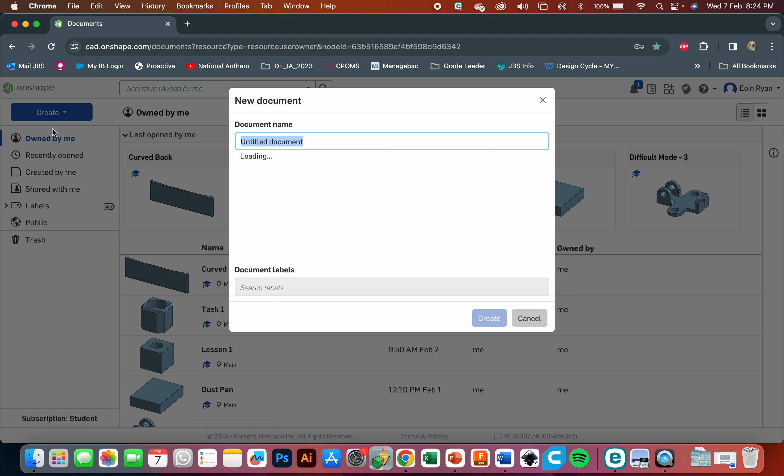To begin with, we're going to head on over to Onshape. We want to go to create document, and we're going to call this task 2. Let's create that and it'll load up for a second. Okay, so we're ready to go from here.

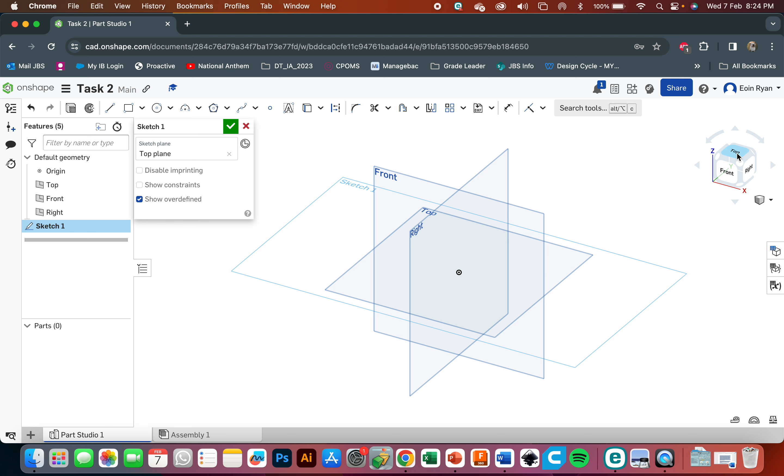The first thing we want to do is click on sketch and click on that top plane. I'll click over here on the right hand side and put that onto my top view, so I'm looking directly down on top of it. Now I'm just going to zoom out a little bit, not necessary, but it helps you keep your work centered.

Coming back over to my drawing, I can see that I need to have some form of a basic rectangle here. I can see I've got 10 plus 100 plus 10, which is 120, and I've got 80 plus 80, which is 160. So that means I'm going to have a rectangle which is 120 by 160.

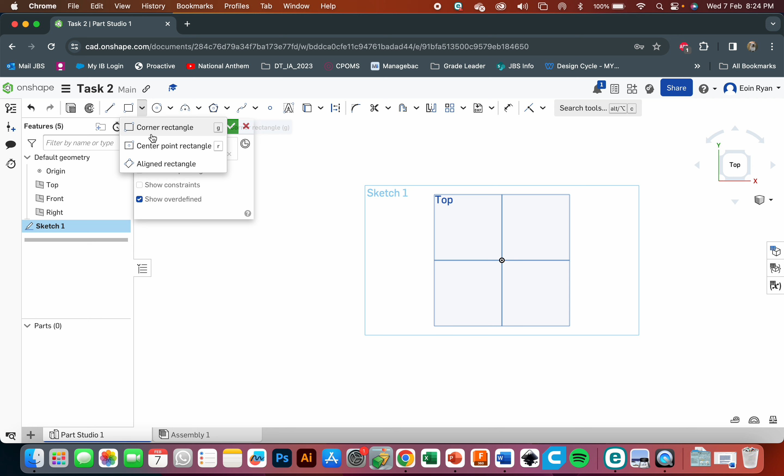From there, I'm going to go to a center point rectangle and draw it out like so. I'm going to come up here to my dimension tool, and change that front measurement to 120, clicking enter. And I'm going to change that side measurement to 160, clicking enter once more. So that's that part done.

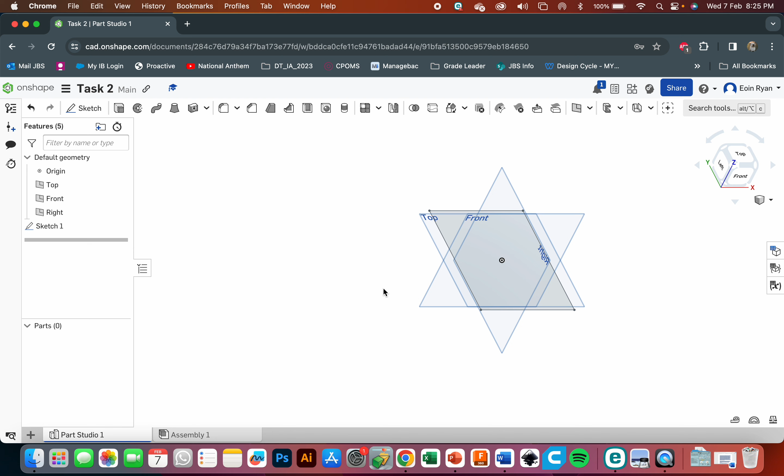I'm going to click on the green tick here, and now I'm going to use my mouse keys, so I can start to see I've got my shape somewhere inside there. Coming back over to my drawing, I'm going to put on this overall height that I've got in my work. You'll see that overall height is over here, which says it is 40.

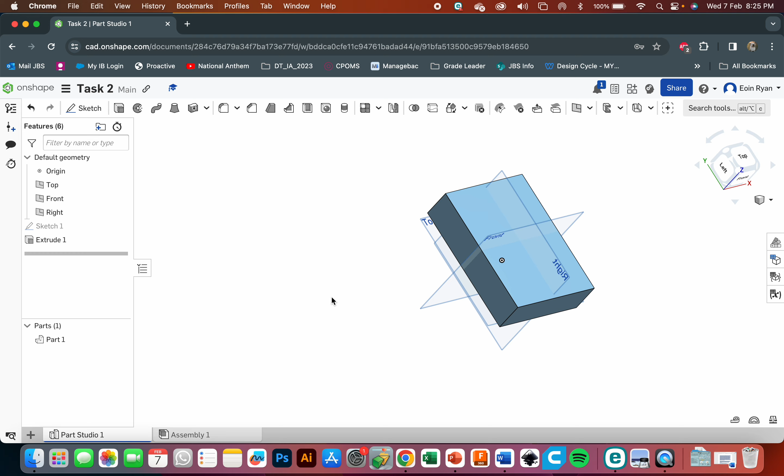So I'm going to go to extrude, and you want to click on that, and type in just over here 40, and click enter once again. So now we're left with this shape, and what we're going to do is start drawing these right corner triangles over here.

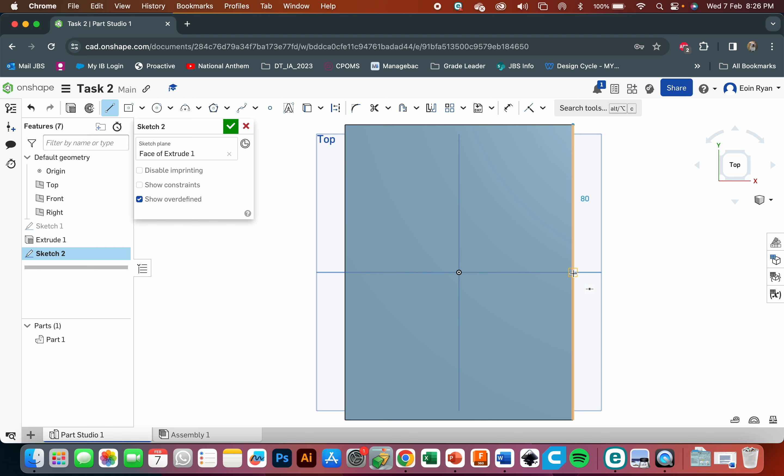You'll see that that's 30, and this distance from here to here is 80, which is just down here. So going once more onto sketch, I'm going to click the top surface, and rotate my drawing so that it's looking this way, and go to line. From here I want to draw a line which is 80 long, and that's going to stretch over here and back to this distance here.

Now the next thing I need to do is dimension that line from here over to here, and type in 40, clicking enter, and here once more that should automatically be set as 80 because you've got that distance there. Now I'm going to repeat the same thing on the other side, from here to here, back over and across. Then once more, I just want to dimension that space there and repeat it once again.

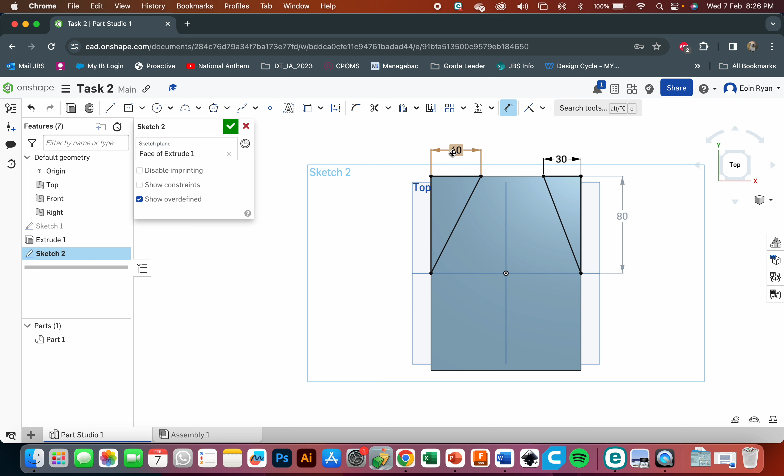Oh, I'm after making a quick mistake there. You see I've said 40. If you make that mistake, all you need to do is double click on your work and type in 30 - my apologies, that's my mistake. And 30. So there you go, you've got your work there.

Then what you're going to do is, again, use my mouse keys. You don't need to do this, but I think it helps with visualizing this. You're going to go to extrude once again. So if it doesn't select your work like it automatically did for mine, it may look something like this - you just need to use your cursor and select on those parts.

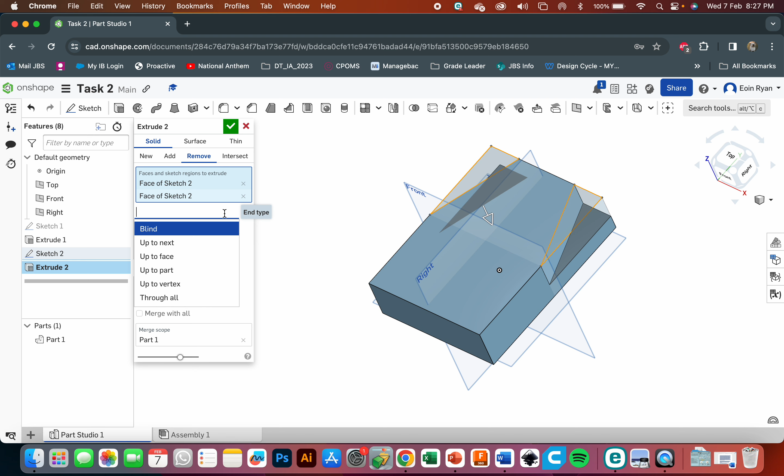A lot of people might just type in the measurement here, but make sure you click on remove. The next mistake some people make is they may have it on surfaces, so make sure that you always have your work sit on solids. Once that's done, you'll click on your two parts, and you can change blind to through all, and then click on the green tick. So now you've ended up with this shape here.

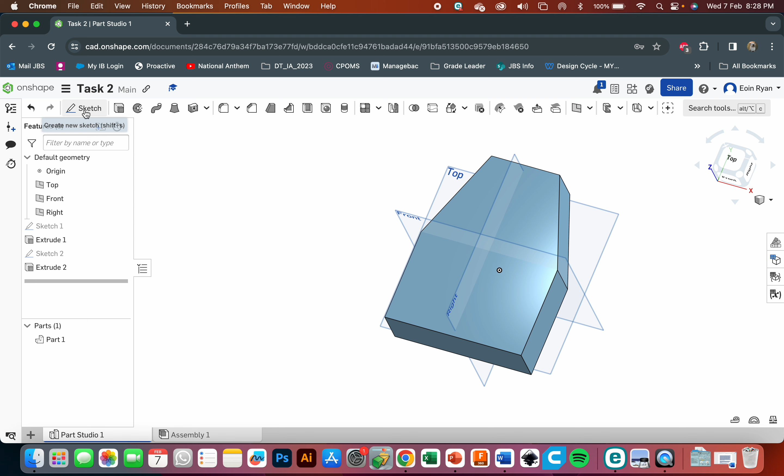From there, where you're going to go is we're going to draw this circular part in here. You can see that's radius 40, and then the distance from here to here, which is the diameter, is going to be 80. So from the beginning, you're going to go to sketch, and again to the top surface, rotate your drawing into your top view.

You're going to go to circle, and drop in a circle there, no size unknown. You're going to use your dimension tool, click on the edge, drag it across, and type in 80, clicking enter.

From there, what you're going to do is create this almost V shape outside here. Come across to your work, use the line tool, click on line just over here, and we want to come from the edge of your work.

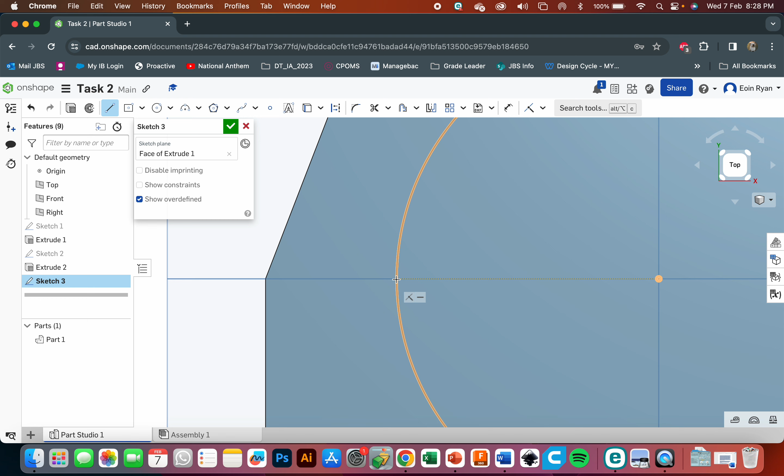You'll know you're selecting on the edge of your work when you see almost a dotted line come up, and when you're right on the edge of your circle, it will come up in an orange color. So we want to click on that edge. Zoom out once again, drag it somewhere down along here, and bring that distance across. Now just to stop that line following me around, I'm going to press escape.

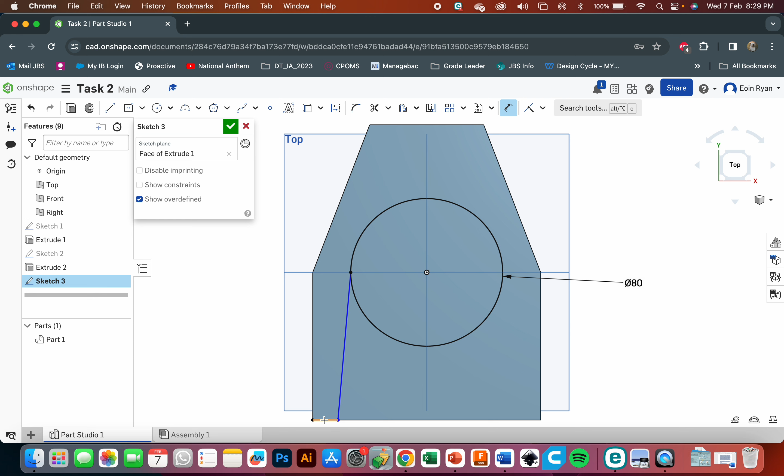And I'm just going to track my work up a little bit more there. I'm going to go to my dimension tool once again, draw this in for 10 millimeters, and click enter. So that's that part done.

So I want to repeat that line over here on this side. Go to line tool again, repeat the same thing once again, and over here press escape on my keyboard. Go to your dimension tool, and type in 10.

Now that's not fully done. We need to close off this drawing in here. So you're going to again go to your line tool and draw that line across there. So now we can click on escape, and what you can see now, it's highlighting.

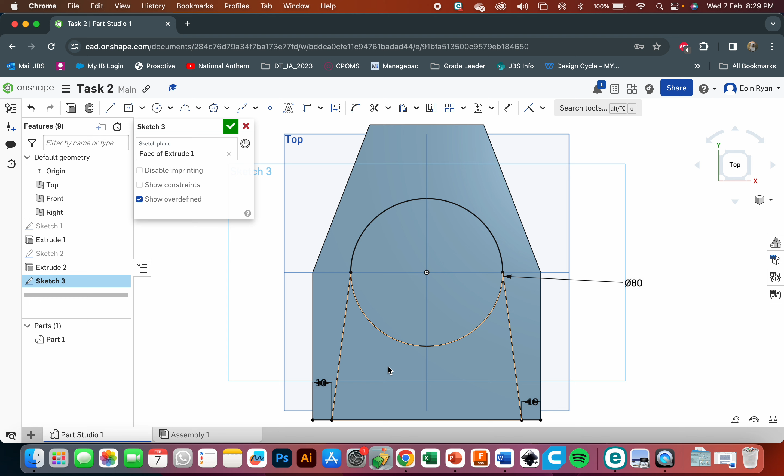For some of you that was a big issue with today's lesson. The biggest reason why that's not appearing is some of you haven't drawn this line on it, and some of you have got this slightly moved, so that seems to be a big area for mistakes. But if you follow those steps, hopefully you should be able to get to here.

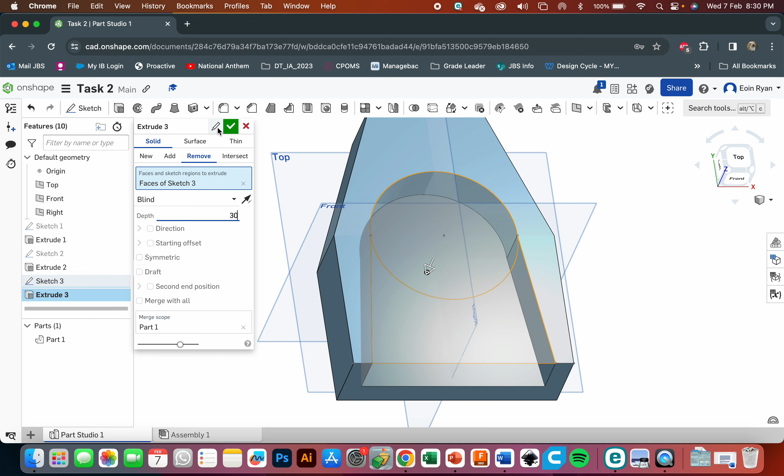From here, we can see that that's going down a distance of 30. Now I know that's sloping at the front, but we're going to completely ignore that till the very end. So we know that's going down 30. Let's do that now. You're going to go to extrude, go to remove, type in 30, and if you click on the green tick, there it's there.

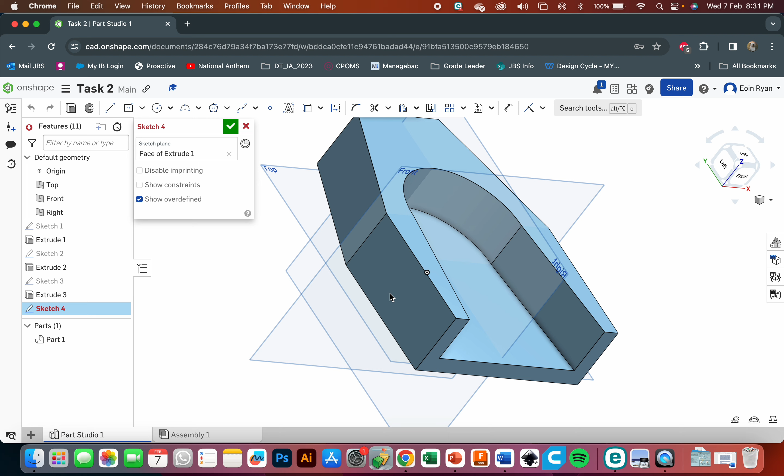So again we've kind of got a triangular shape here, and we're going to draw that on the side of our work and cut it across the whole way, 20 by 80. To do that, go to sketch once again, and click on any side, it could be this side or the far side. I'm going to click on that, and move that fully across so we're looking directly at it. Let's double check our drawing so we don't make a mistake.

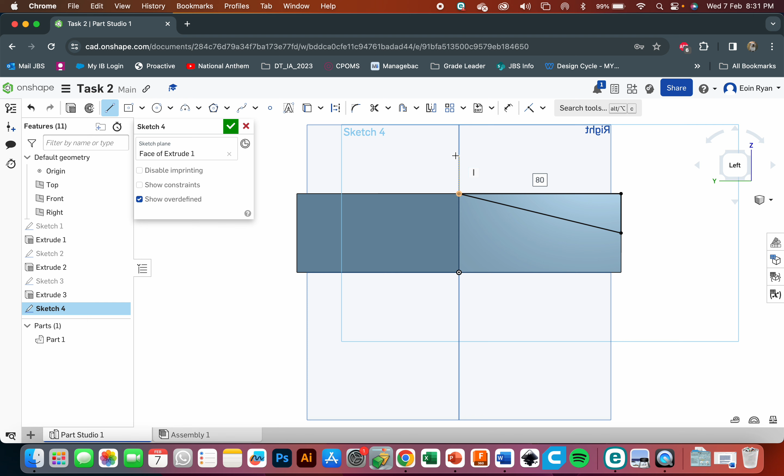So 20 and 80. You want to go to our line function again, step down here 20, and then that is going to come up to this point and come across to here. Now some of you will say, how do you know those distances? Again, if you set your drawing up correctly, I'm using those planes of reference to really help me out, the same way I would have drew with my semicircle there at the beginning.

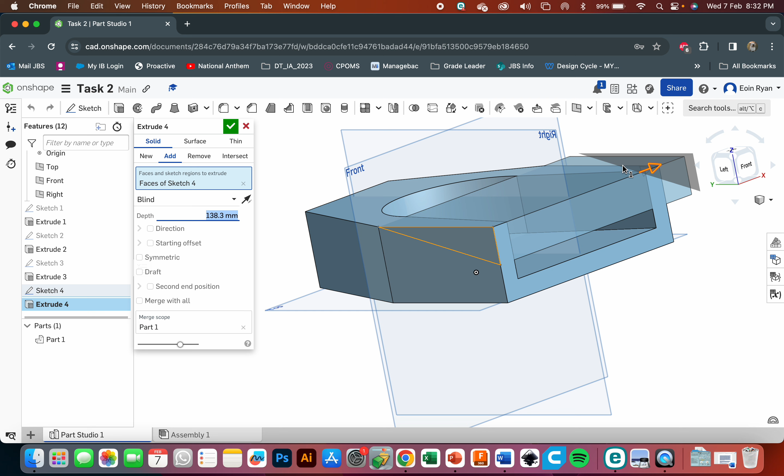Go to my dimension tool, click on this line here, double check it, make sure it's 20, that's great, and double check this one, it's 80, okay, so that's perfect. Now again just going to move that across, and we're going to go to extrude, and push that the whole way through. So again, you can see there, I don't have it set to remove.

Once I set that to remove, click on the green tick, and there we go, we got our work.

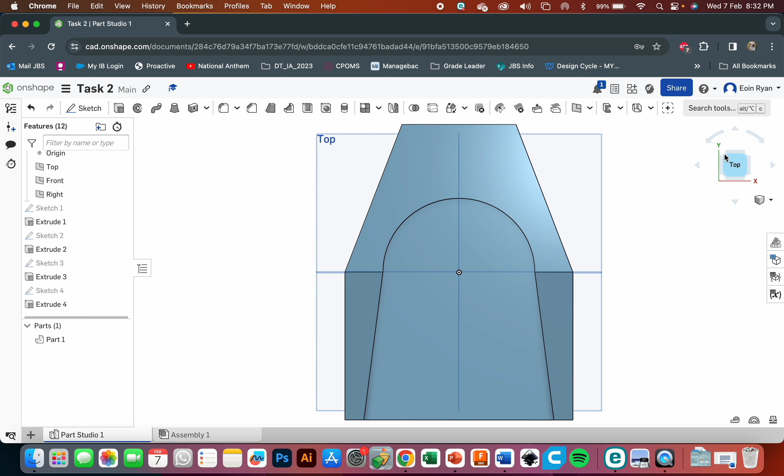Okay, so we're coming towards the end now of our systems. What we'll focus on next is this part back here. We can see it's got a circular shape on it, and the rest is basically a rectangle, which becomes a cuboid with some form of a curved edge on it. To begin, we're going to start with drawing it as if it is a rectangle.

So again, we're going to go to our top view and zoom into that back corner. We are going to use sketch on our top surface. We can see it's 30 across, and it's going to come up 20, so that's going to be for our extrude. We want to draw some form of a rectangle that stretches down along here, overlapping that part and coming across.

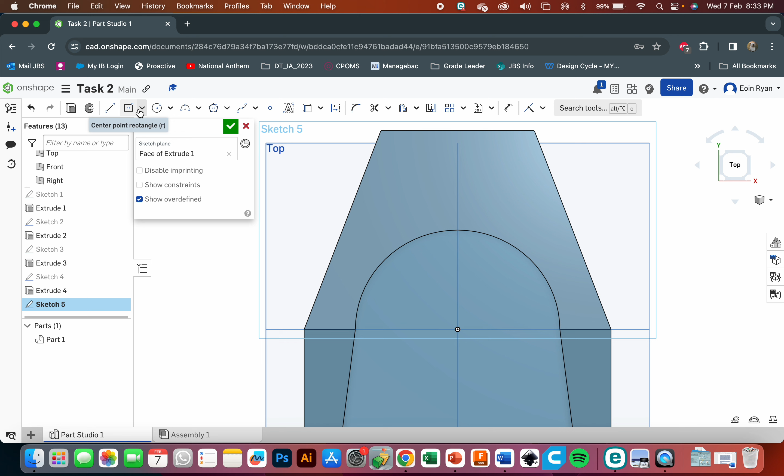Instead of using a center point rectangle, I'm going to use a corner rectangle this time. Stretch that across, and it comes somewhere up about here. We'll just place it randomly in about there - there's no dimension set yet, but we will come back and start to dimension this.

Going back to our drawing, we can see it's 30 across, but there's a midpoint or halfway line going through it, so half of 30 is going to be 15. Go to our dimension tool, draw it across here, and type in 15. Again, we want to repeat that on the far side.

So again, go to your corner rectangle and draw this across here again, placing it randomly somewhere about here. Again, go to your dimension tool, come across here, type in 15, and click enter.

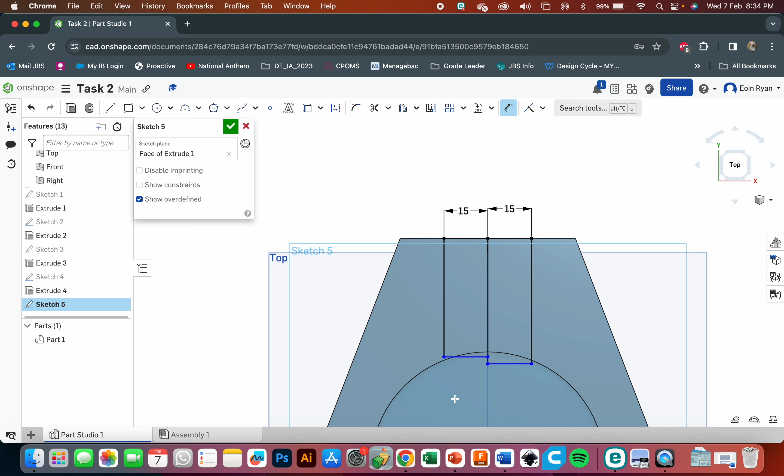So now we're left with these kind of faces out here that we don't know a measurement of and need to figure out. What we can see is these are coming out a radius of 40.

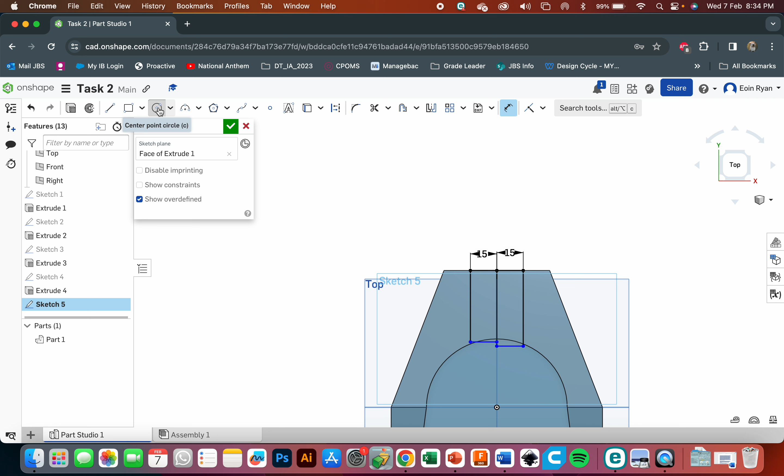To do that, we're going to use our circular tool again, going from this point here and drawing it across back to here. Go to your dimension tool and set that to 80 once again.

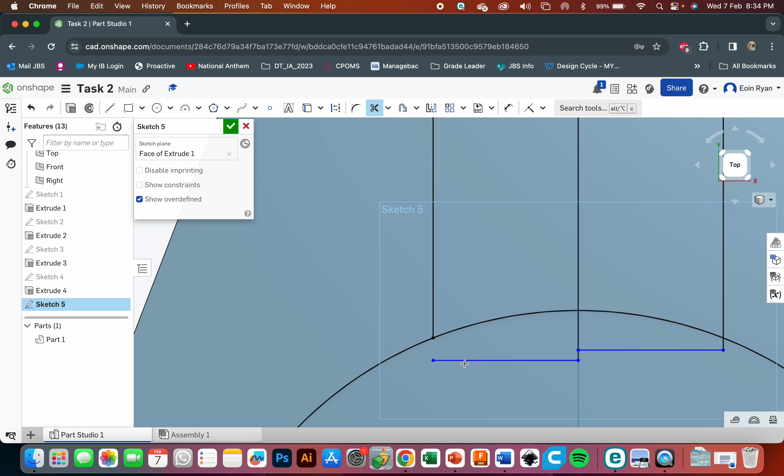Now these should be overlapping this part, apart from this little corner here, which is my mistake. Just click on that, drag it out ever so slightly so you've got a bit of an overlap. Come to the trim function - trim is like scissors, trims away the excess. Clicking on that: remove, remove, remove, remove, remove, and get the last little part.

Some of you will leave it there, but to speed things up when it comes to extrude, if you remove that one too, it's a nice little trick. We'll rotate our work so we can see it for the sake of the video. Zooming in, come to extrude. We want to go to add.

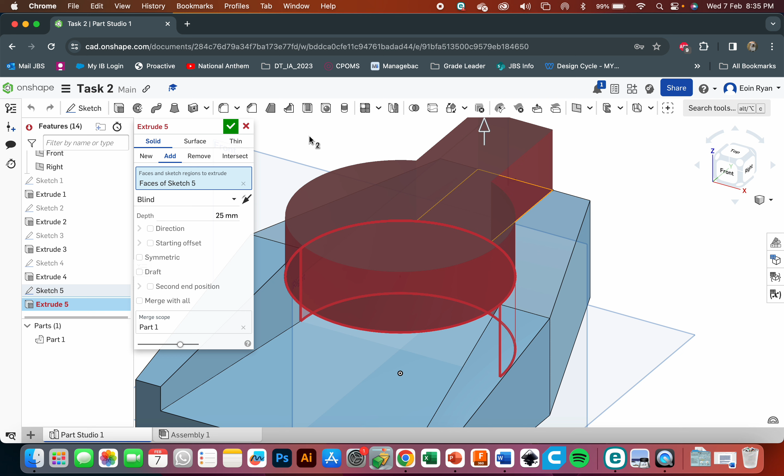So let's see what's going on with this now. There we go. And we want that to come up with 20, so change that to 20 and click enter.

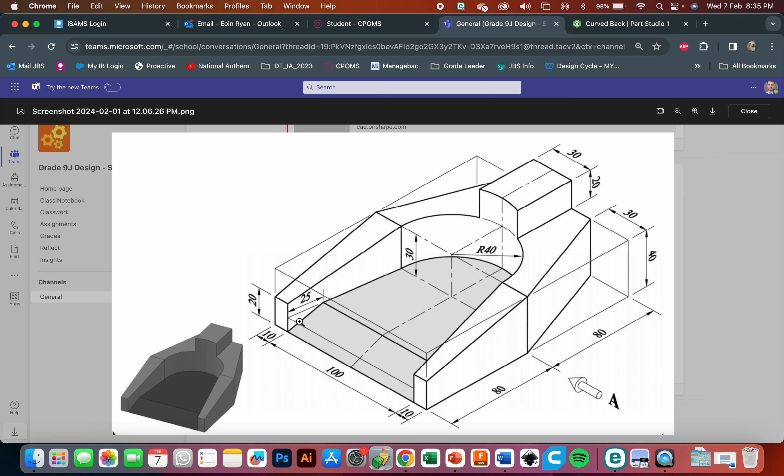So that's that there. Now, last but not least, it's going to be that slanted section on here. There's a quick tool to do that - it's back 20, it's back 25, but if you come over here, there's a tool called chamfer.

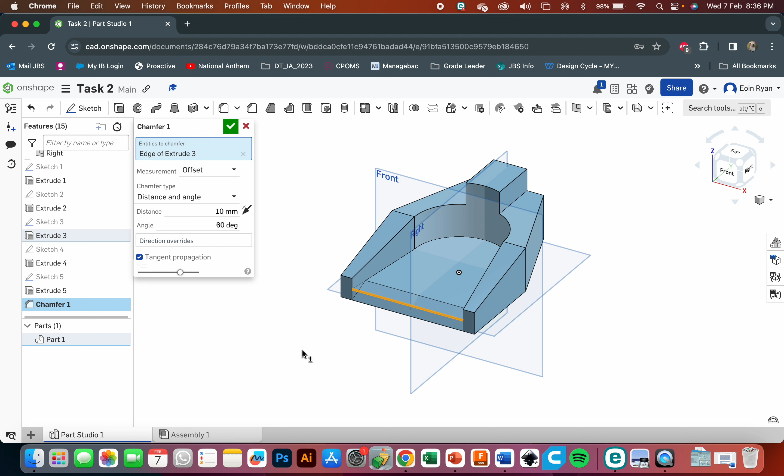If you click on chamfer and put that on there, we're going to set the degrees here to 60. I'm going to set this to 5, maybe... okay, maybe 8... 10. There we go - 60 and 10, so 60 degrees and 10 worth of a distance. Seems to be working quite nicely there.

And you can click the green tick. So that is effectively that project done.